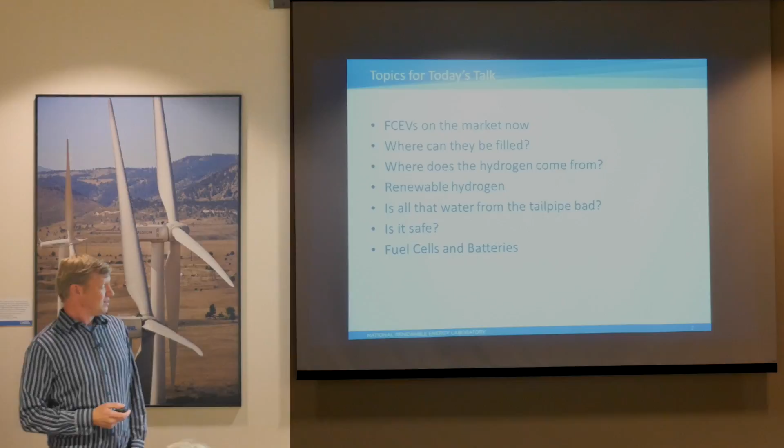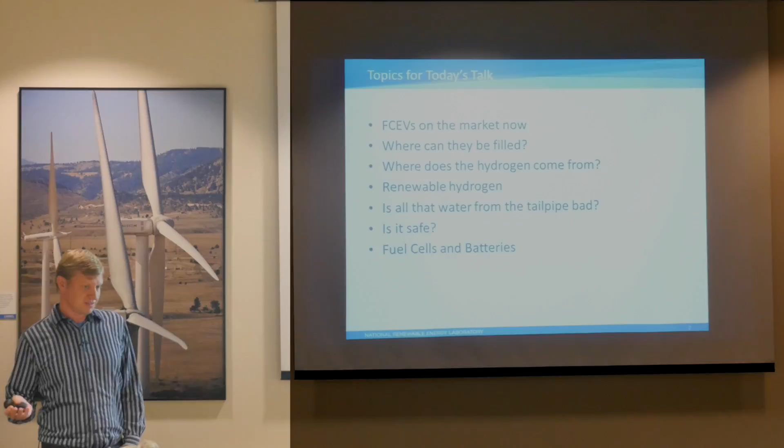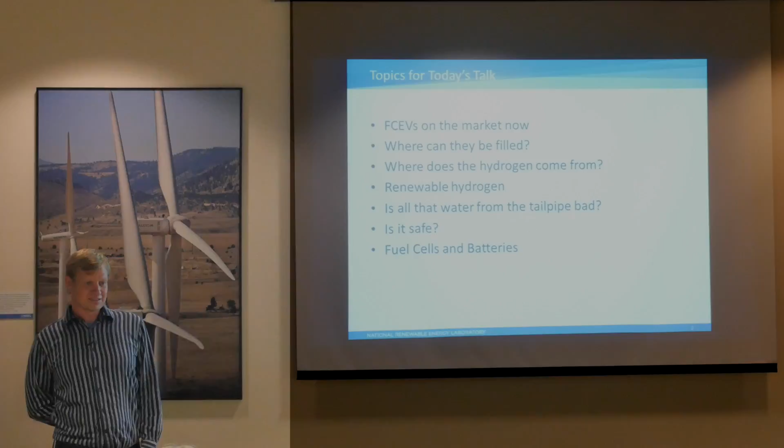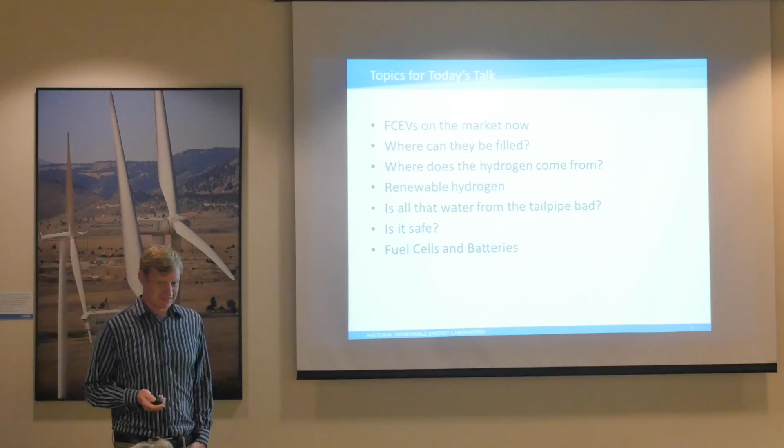I've been managing the fuel cell vehicle program here, where we have 3 fuel cell vehicles on campus right now that NREL employees can check out and drive to events and get an idea of how they work. Doing these events, I get lots of questions, so I was trying to get those answered here, and I was going to use those questions as the basis for this talk. Feel free to ask questions throughout as you'd like.

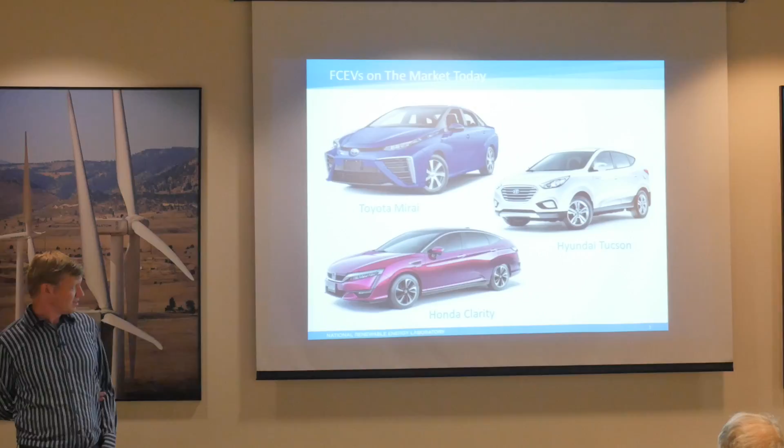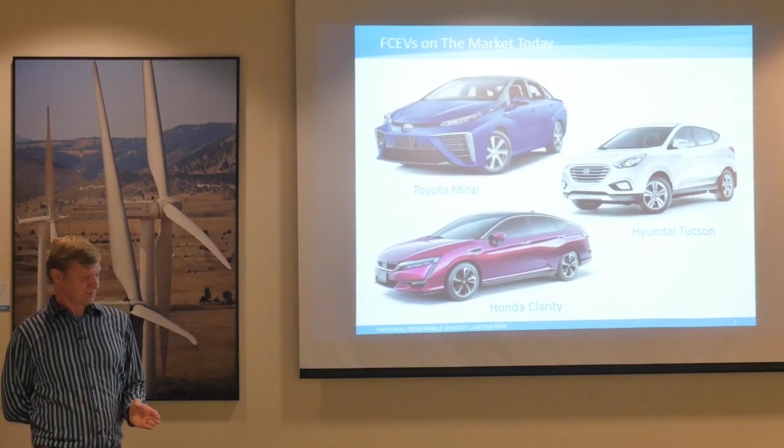These are the 3 fuel cell vehicles on the market right now. The Toyota Mirai has been on the market for about a year. I looked at its sales numbers this morning - they're selling about 40 a month for the first year, but a couple of months ago they had a month where they sold 370. So there's quite a bit in California right now. They're only available in California, that's where the fueling infrastructure is.

The Hyundai Tucson is the white one here. That one has been around a bit more, and it's only available for lease. I don't know those numbers offhand. The Honda Clarity has gone on sale in Japan right now. It hasn't come to the US yet, but they're planning on it soon. I don't know if it'll be by the end of the year or early next year, but that's their plan for the Clarity.

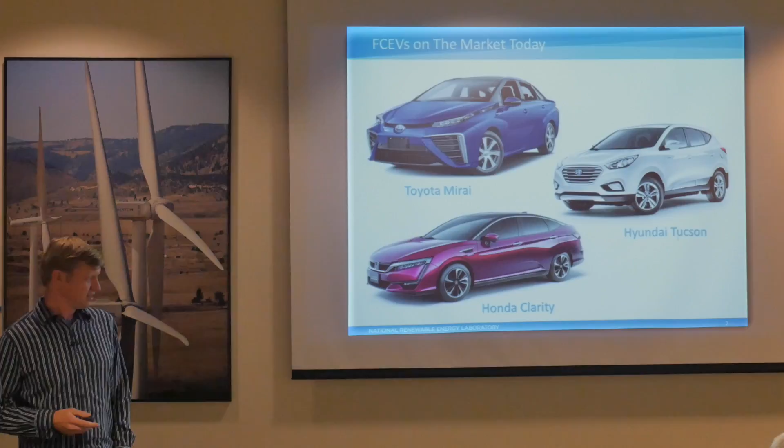I took the spec sheets from the Toyota Mirai and compiled some of the specs that most people want to hear about at these events. The torque is 247 foot-pounds. The storage can hold 70 megapascals of pressure, which is about 10,000 psi. There's 5 kilograms of hydrogen on board, and fueling time takes about 5 minutes.

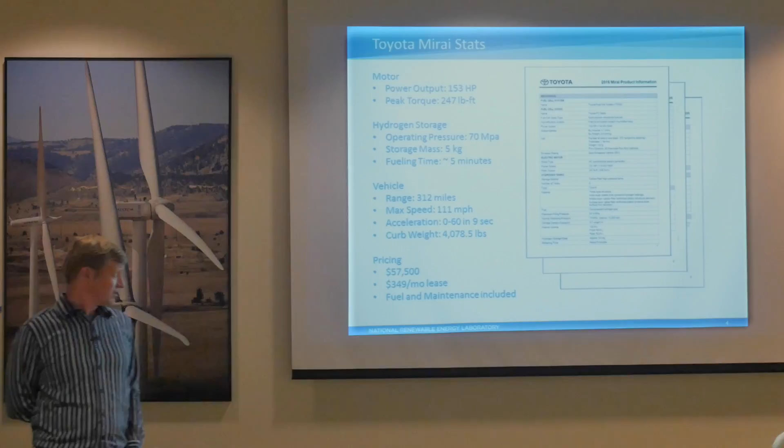As we found, that's a pretty conservative estimate - we can get down to 3 or 4 minutes usually with our fueling station out back. The vehicle can go 312 miles on a fill, depending on driving conditions and the driver. If you accelerate a lot faster, your range will go down. There's actually a power mode and an eco mode on the Mirai - in eco mode you definitely don't have the pickup, but you can conserve your miles. In power mode you can go a lot faster.

Its acceleration is 0 to 60 in 9 seconds, which isn't too bad. Its curb weight is a bit heavier than a conventional vehicle. I'm not sure exactly where the weight comes from, but that's one question I haven't been able to answer yet.

Does it have a storage battery - the fuel cell makes electricity, and then the storage battery delivers it to the wheels as needed? Yes, it has the equivalent of a hybrid battery on board that can store 1 to 2 kilowatt hours. It stores the regenerative braking, and when you let off the accelerator, there's still hydrogen going through the fuel cell that it can divert to the battery rather than to the wheels. So the hydrogen runs a generator? No, it runs directly off the hydrogen fuel cell. The battery can assist as needed, but its main source of power is from the fuel cell. So the battery's just buffering? Yeah, exactly - it can give some initial get-up-and-go and then store energy on your braking as well.

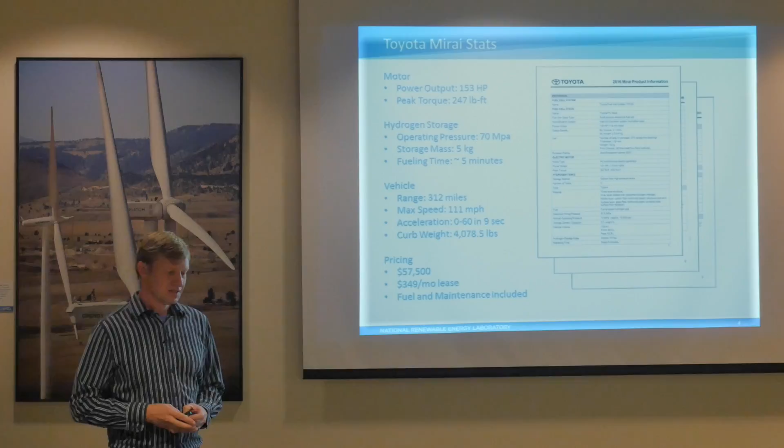Are these PEM membrane fuel cells we're talking about? Yes, they are - those are the lightest and most suitable for transportation right now.

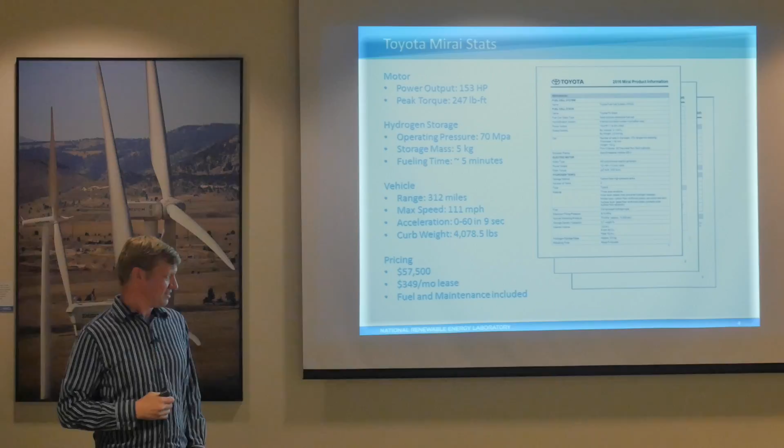The pricing that's out right now - it's 57.5 thousand dollars to buy, and for leases they just dropped it to $349 a month. It was $499, and they just announced last month that it's going down to $349. All fuel and maintenance is included, and I'll get into reasons for fuel being included later on.

There's also fuel cell buses that are being run right now. I do a lot of work with the fuel cell bus analysis here. At AC Transit, there are 13 fuel cell buses being run in their fleet right now.

It's a demonstration project that's been going on for 5 years now, I think.

And the next biggest is Sunline. They actually have 2 different projects going on there, but 4 buses in total at their depot, and the rest are a couple buses here and there.

So the buses have been demonstrated to run really well. The drivers seem to like them. They're really quiet compared to diesel buses. They only put out water from the tailpipe, so people really like it. There's actually a complaint on the buses when the air conditioner would kick on. The noise from the air conditioner was so loud, but it's the same air conditioner as regular buses. They just didn't have the engine noise to cover it up, so that intermittent sound from them became a source of complaint once you took away the engine noise.

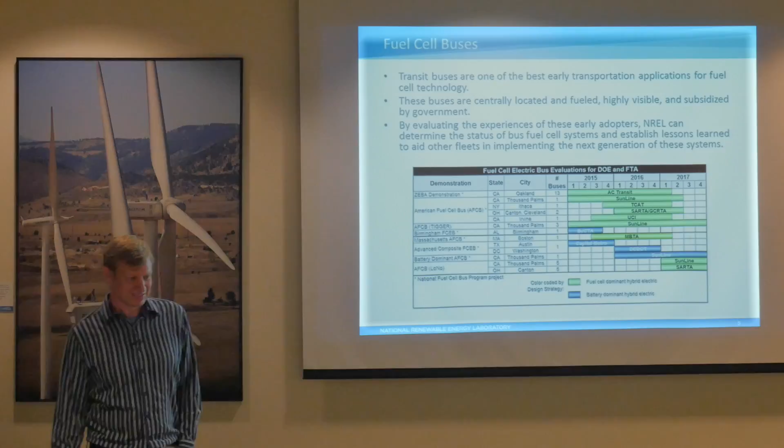What's the hydrogen pressure on the buses? Those are half the pressure. They're 5,000 psi. Because you got so much room, you can do bigger tanks on them and not have your loss that way. So these are a couple that are slated for the future.

This one is an actual going to be a production vehicle coming early 2017, and this is a concept vehicle for Lexus. It's kind of has some interesting stylings that'll be toned down as they go to their production version.

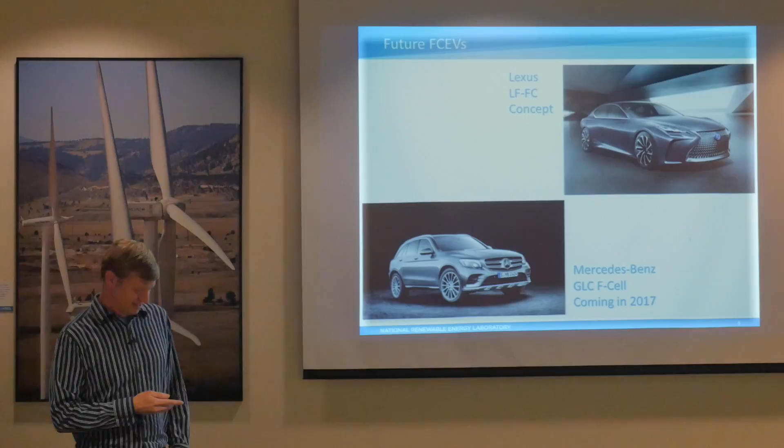All right, so I get the question a lot of how does a fuel cell vehicle work? You open the hood, and you don't see too much under the hood because it's all the power control unit and the motors underneath there, and it's got an air intake and your auxiliary components. That it's not really what actually runs the car.

How serious is air filtration? Like on ICE, you have the air filter that you got to change. Is this very similar to that?

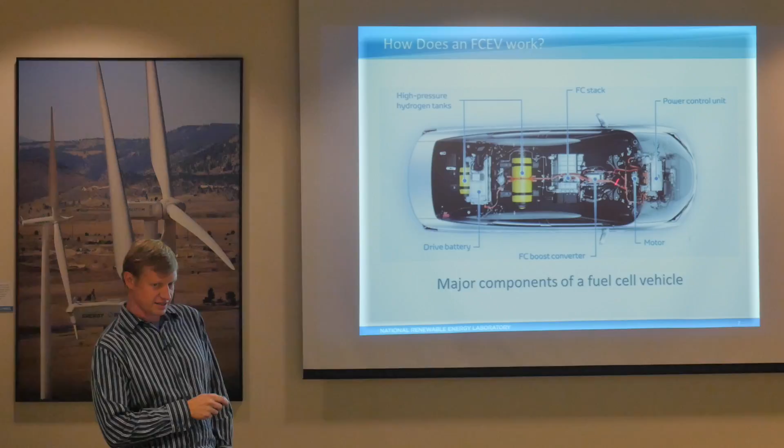And then people ask, how does a fuel cell work? I'm a chemist, but I don't know exactly all the little details of a fuel cell. I work more on the infrastructure side right now, but if you have questions about exact catalysts and everything, I can direct you to people that do that every day. But in general, it's a pretty simple process.

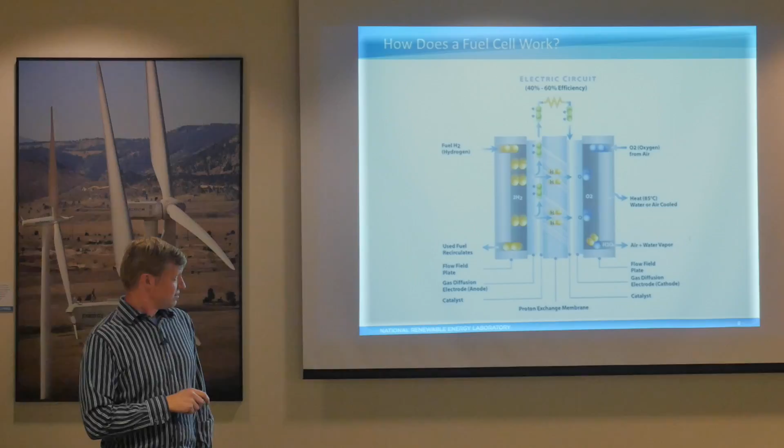You put hydrogen in on one side, and you put air on the other side. You can just recirculate the hydrogen through to keep a fresh supply going against the membrane, and the hydrogen will permeate through the membrane, and as it does that, the electrons get stripped off of it through the membrane. It's an interesting membrane - it has to permeate hydrogen through, but also conduct electricity. So you can capture the electricity through the membrane and bring it back around through your system and come back around to supply the electrons back on the other side. So you basically are taking the oxygen and reacting it with the hydrogen through the membrane to create electricity and then just make water.

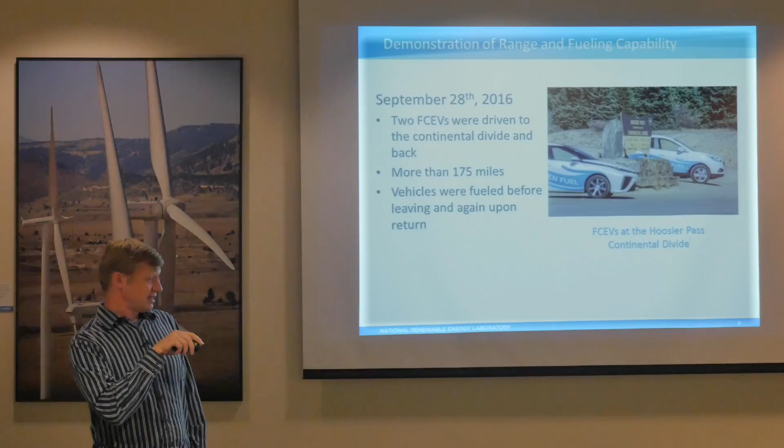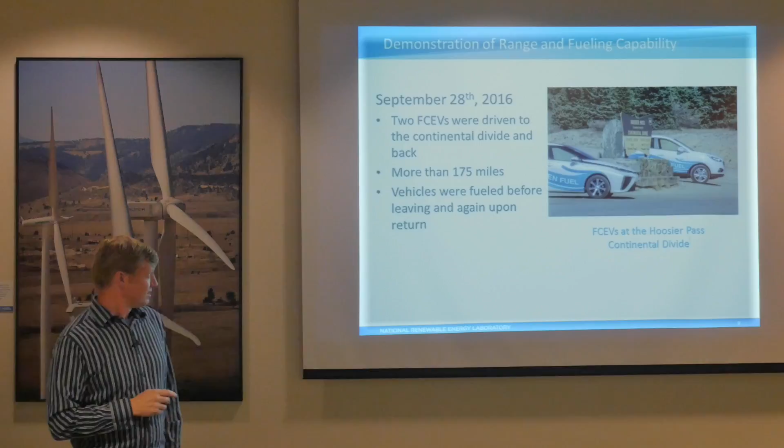So here's a demonstration project we did last week where we took two of the fuel cell vehicles we have up to the Continental Divide. We wanted to demonstrate the fueling capability that we have here, and also show that the vehicles can be used and show the range of the vehicles basically. So we took them up I-70 up to Breckenridge and came back down 285 through Fairplay, and we did a loop that was more than 175 miles. We fueled the vehicles before and after, just to show that you can bring it in and fuel it just like a gasoline vehicle would be today.

So getting into stations, I took this from the alternative fueling station locator, which any fueling station can add their kinds of fueling stations to, and you can go through and find - if you have a CNG vehicle, you can go to the next station.

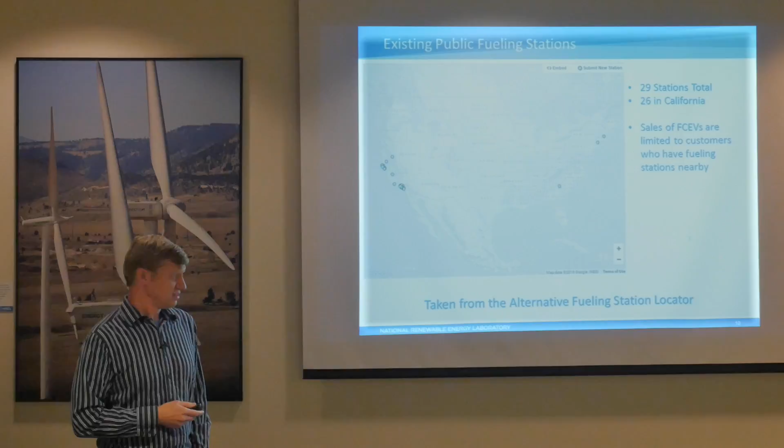The hydrogen definitely has the fewest number on the database. Currently, there's 29 stations, 26 of them are in California. So that's why all the manufacturers are starting out in California. There's a few on the East Coast here that are starting up, but they're really ramping up the production of the stations. So in the next year, these are all permitted and ready to go in some stage of completion, and they'll come close to doubling the amount of stations, which will hopefully allow more vehicles on the road and sustain the vehicles that are going right now.

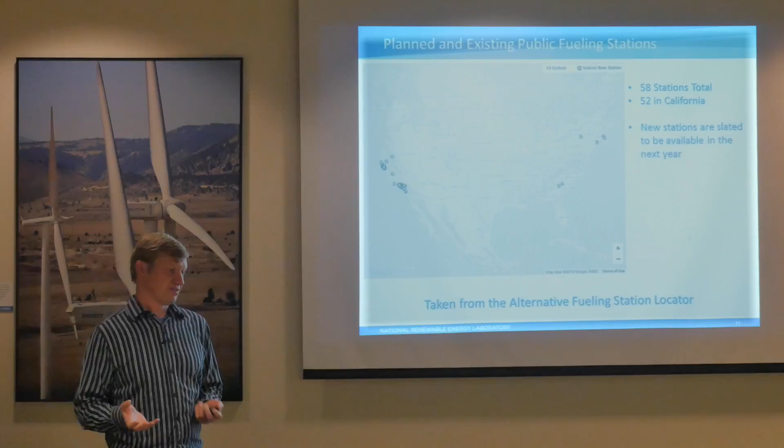So are these stations being loaded out of a big tank truck, or are they using power to do the hydrogen generation? That's a good question actually. Later on I kind of go through how some stations are done, but they kind of have a mix right now because they don't know what the best option is. So there's some that do on-site electrolysis, some that do on-site steam methane reforming, some that have delivery - deliver a big set of tanks that you can put a new one on and pull the old one off, and some deliver liquid hydrogen. So they're going through the options right now and trying to settle in on what the best option is.

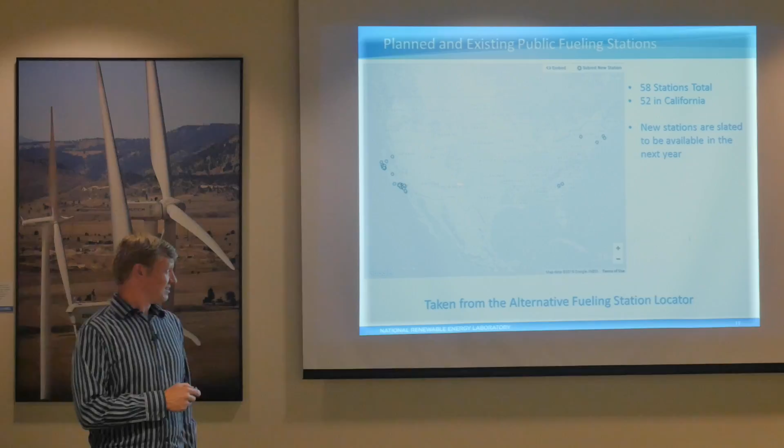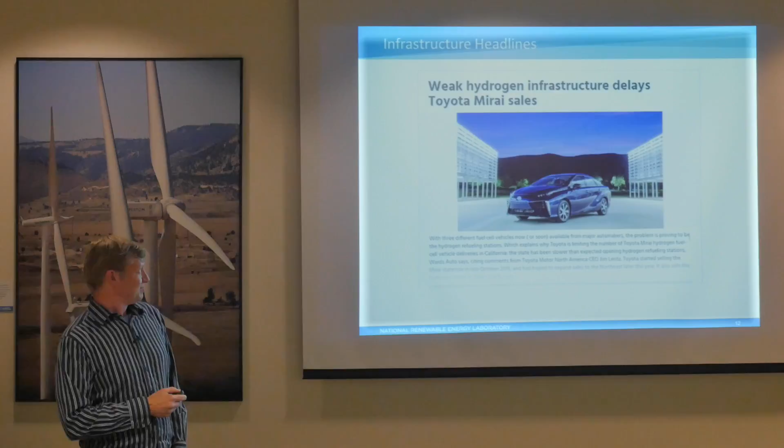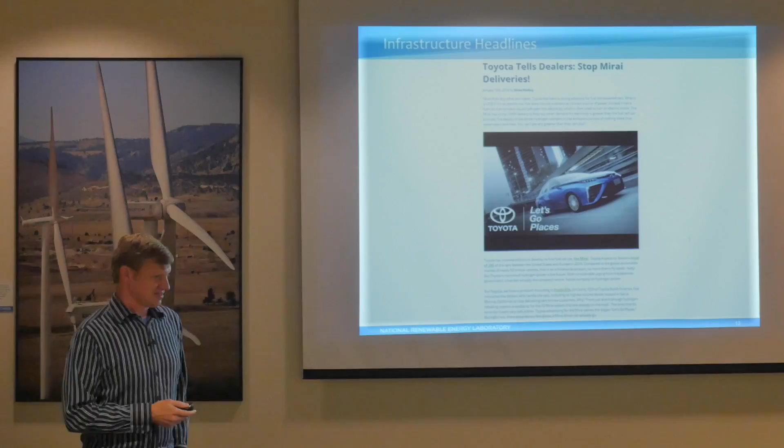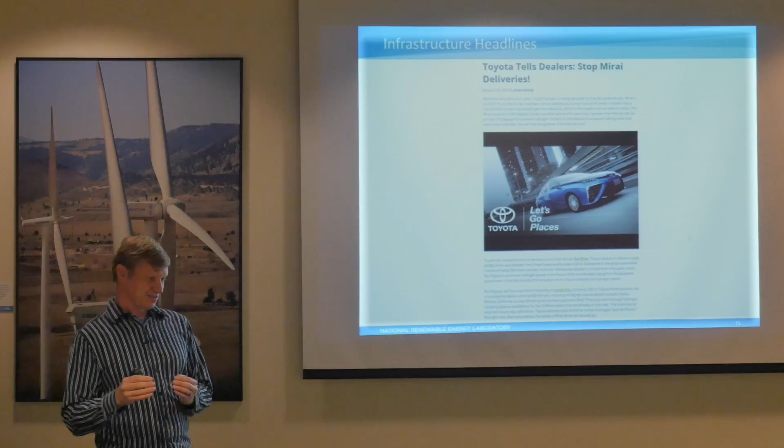So seeing that there's so few stations, it kind of leads you to think, when is this actually going to start ramping up? And so you get headlines like this where weak hydrogen infrastructure delays Toyota Mirai sales, and Toyota tells dealers stop Mirai deliveries. So there's kind of some pushback from the dealers - they want to get these vehicles out, and there's not the stations out there. So there's kind of a balance going on right now of where's the hydrogen coming from to supply the vehicles, and the vehicles are ready to go.

So this comes up to what NREL is working on with infrastructure challenges. Tesla got ahead of this on electric by starting superchargers across the country, yeah, Toyota didn't go and do a similar thing. Toyota is actually funding some stations now, so they're kind of going that route as well. They're doing a lot of the East Coast ones and supplementing some on the California side. So yeah, funding is not my main point of expertise.

But I can find you more information on that if you're interested.

So there's a few things that need to happen for the stations to become really prevalent. Reliability is a big thing we're working on here. We have a test station out back of the ESIF with different size compressors on a big pad where we can swap in components and try out different chillers. We have one dispenser here, and space if we want to put a second one to test out two different dispensers. So there's a lot we can do, and we're really working on ramping that up.

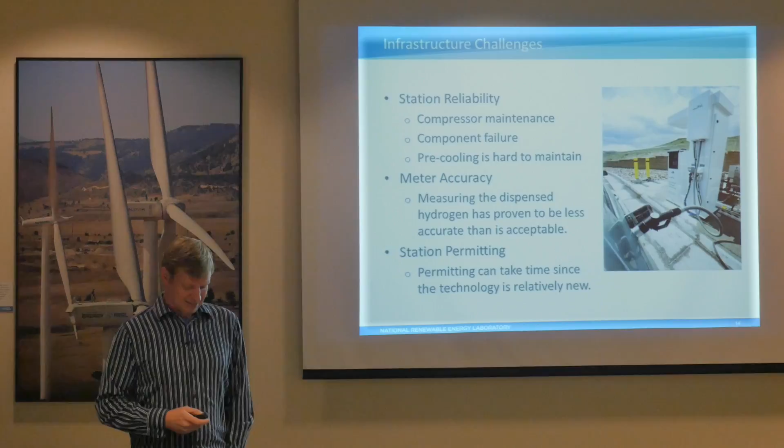And it's all done differently at every state. So that makes it kind of a challenge, trying to get everything standardized, and one state might require one thing where another state won't. So that's the big challenge with the station permitting right now.

So what are the PSI for low, medium, and high here? The low is a couple hundred PSI. I think it comes from the compressor, or from the electrolyzer, I forget exactly, I want to say 200 PSI. And then it'll boost to the medium storage, which is around 6,000 PSI, and then to the high storage, which is 12,000 or 13,000 PSI.

Just curious, why have 3 different pressure levels in the storage? So the electrolyzer can—and that's actually a good point—a lot of stations now are going to a single stage where they'll boost it all at once, and some of those compressors can do that now. This was kind of the standard a couple of years ago when they would boost to medium pressure and then go to a high pressure storage.

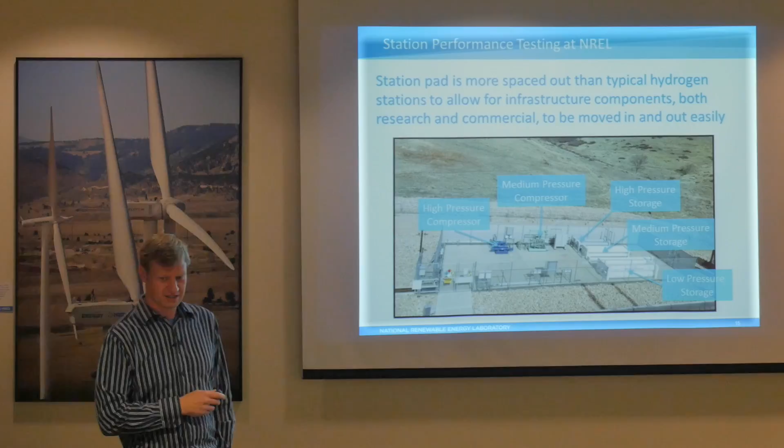Is there any cooling in this? The cooling is done at the dispenser, which is off on this side, so the chiller is back here. I think I've got a picture of it later on.

They do inspections before and after, and it's in a high pressure test bay out back, so they can test it to failure if they want to go that far. They can monitor if it starts losing pressure, and there's monitoring in case a leak is detected.

What is the temperature going through the hose when pressurizing for a 10K automobile? This one has a chiller, so it simulates the chilling as well—they can flow low temperature gas through it and then let it heat up again. What temperature is it? Negative 40, that's where Celsius and Fahrenheit meet.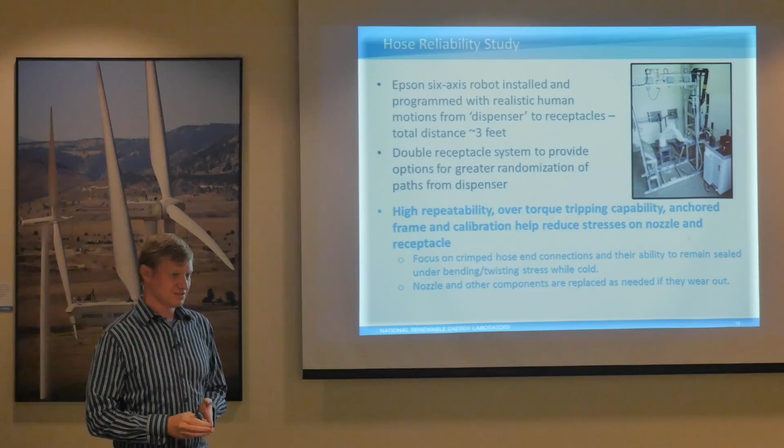Then this is the H2First project that's been started here—it's a partnership between Sandia and NREL. It's a group that determines what projects need to be done, and they've worked with the DOE to fund different projects at the national labs.

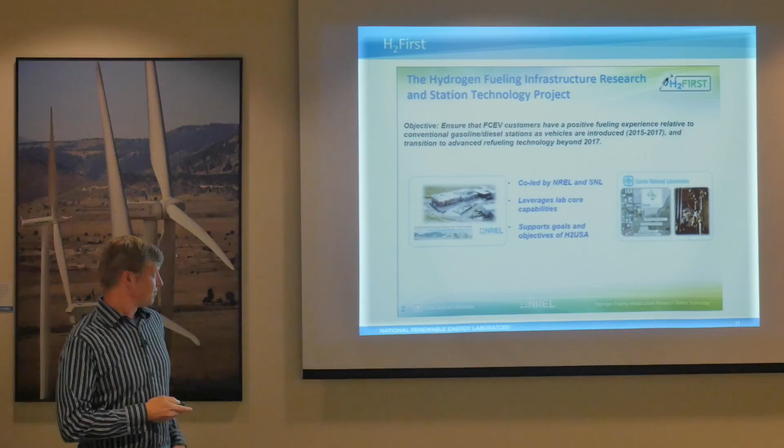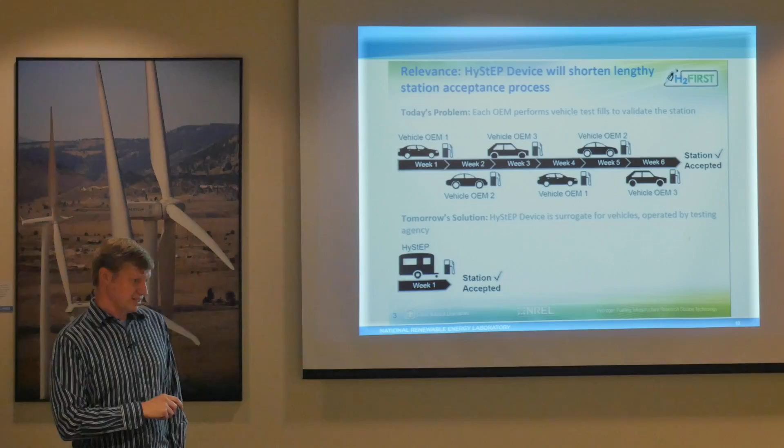One of those projects is the HyStEP Device—a device on a trailer that can be brought to fueling stations to check if it's meeting flow accuracies, flow rates, and the temperature and quality of the gas. It used to be that each OEM would have to certify the station themselves, bringing their vehicle tester there to test for a week, twice, taking about 6 weeks for a station to be accepted. With the HyStEP device, they can bring this trailer there, and all the OEMs agreed to accept that as a certification.

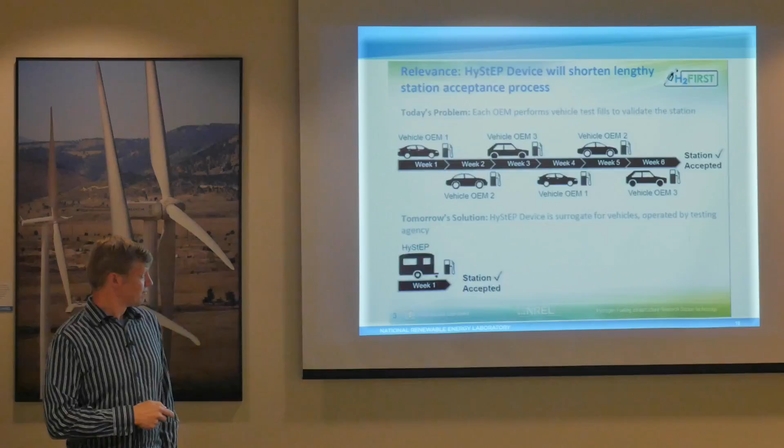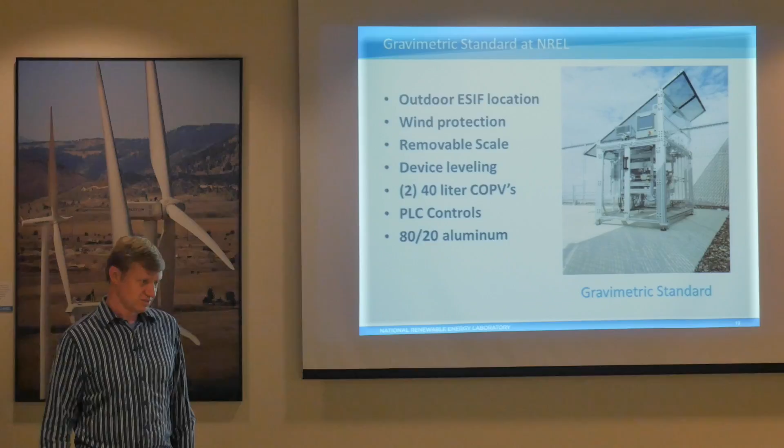This is the video that Carl has been working on—a permitting video that goes through all the steps needed to permit a station. It just came out last week, right Carl? This is going to be a big help for people trying to put stations online.

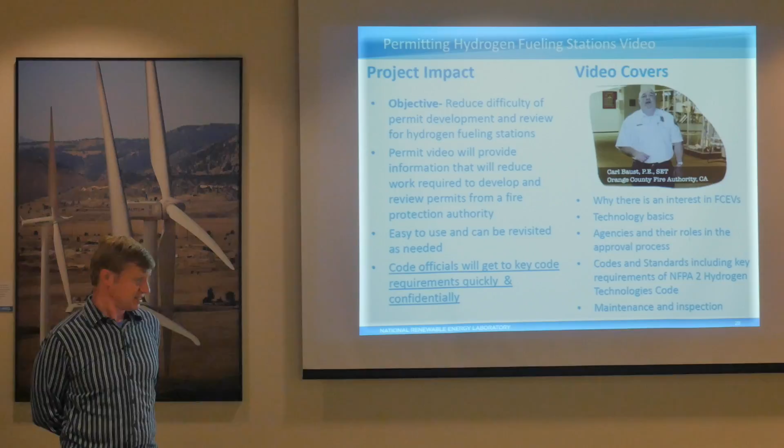So the next question I get is, where does the hydrogen come from? There's 2 methods right now that are being used, plus some other methods being looked at, like making hydrogen from algae or other catalysts. But the 2 main ones used right now are steam methane reforming, and electrolysis, which is basically splitting water. It's doing the opposite reaction as a fuel cell, where you put in electricity, split water, and get hydrogen out.

Steam methane reforming is the cheapest method right now, and there's a lot of methane out there to use. But it does make CO2, and it's a fossil-based gas. Electrolysis is more expensive, but it can be done with renewable sources—you can use wind and solar to provide the electricity to split the water.

So when you say cheapest and more expensive, what price point, assuming electricity rates stay where they're at—because renewables are coming down, but gas can fluctuate dramatically on price—where would the crossover be, how many dollars per million does it become a wash? That's the million dollar question right now. I don't have that answer, and there's a lot of people trying to come up with it, so I don't know right now.

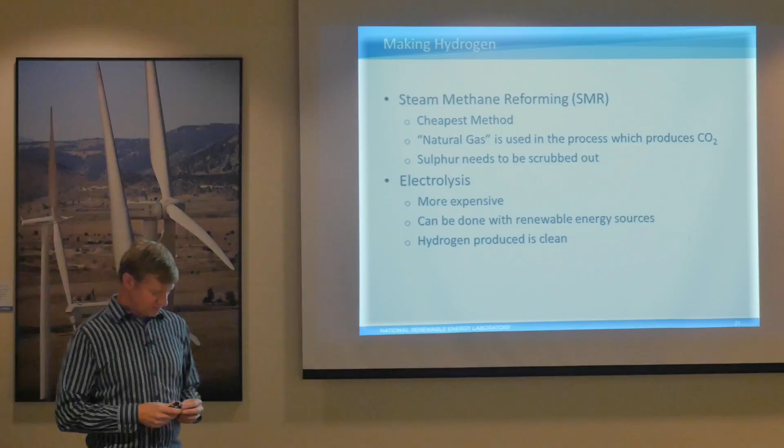So it takes a significant amount of electricity? It does. I forget the exact losses, it's probably a 30% hit there, so you don't get nearly as many joules of hydrogen out as you put in, but it's a way to store energy basically.

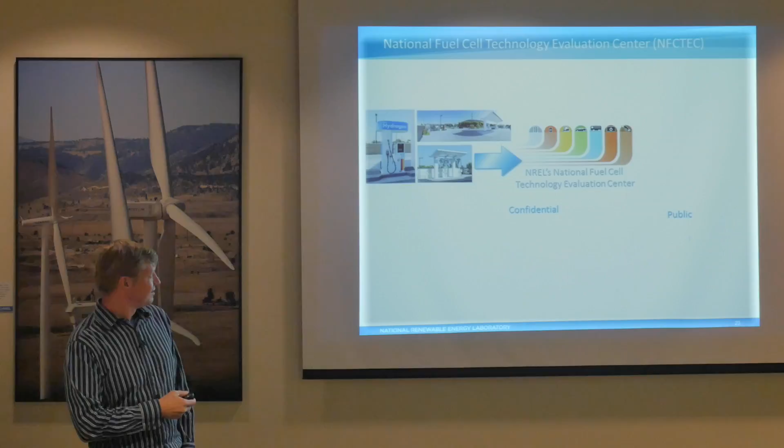Then there's 2 different ways to get the hydrogen to a fueling station: you can produce it on site, or you can have it delivered. They're both being tested, like I said earlier, so I won't dwell on that too much.

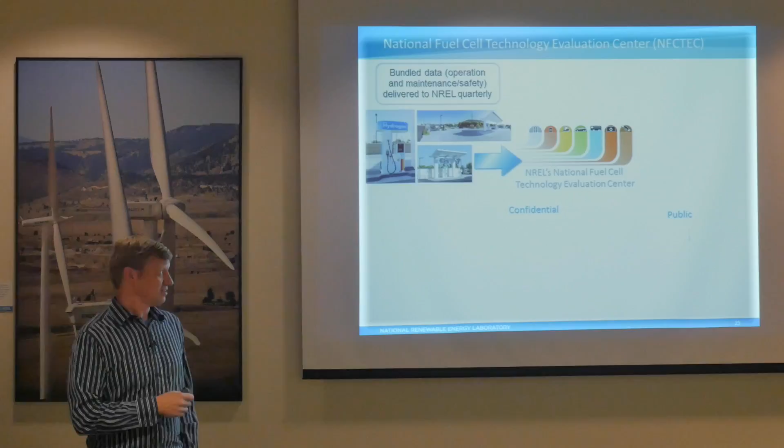This didn't come across all the way. This slide is supposed to be about our NFCTEC, the National Fuel Cell Technology Evaluation Center. If you click through—I think it's sequential. Oh, it is, okay, I didn't realize it did that. I just copied and pasted from a different slide.

So basically we collect data from manufacturers, and we try to get a good idea of where the market is today, so that we can work with the manufacturers and send them back data products that show their numbers versus what's on the market today. And then out to the public, we just send out composite data products, so they can't identify one manufacturer versus another, but can still get an idea of where the whole market is.

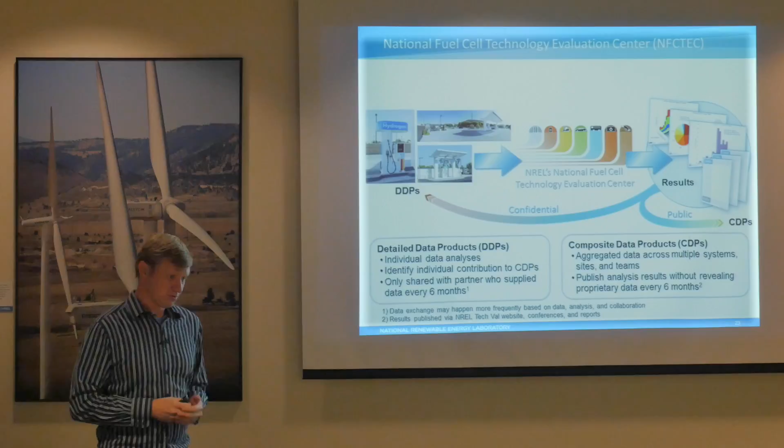Another big project that's just starting is called H2 at Scale. It's basically taking the energy systems at the ESIF and combining hydrogen into that. So how do we take the existing infrastructure, work in hydrogen, and come out with the best products around?

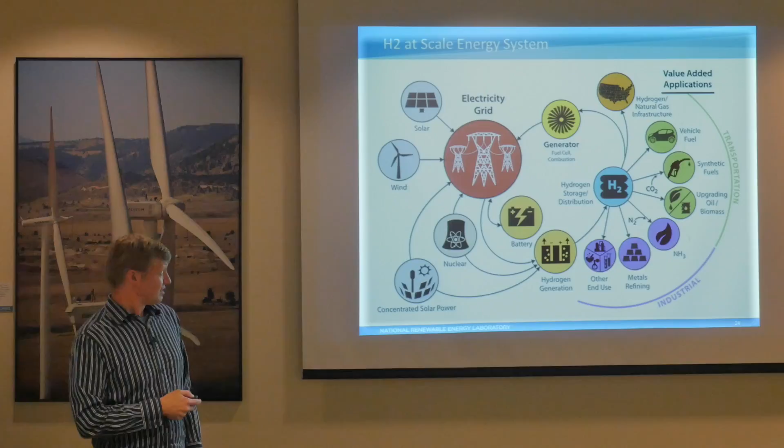This is just coming out, so I don't know all the details on this, but I know this graphic. It shows quite a bit here, where you have renewables coming onto the grid, making the hydrogen, and you can use it in different vehicles and everything, and then come back on the grid if you need to. It's an exciting new project going on.

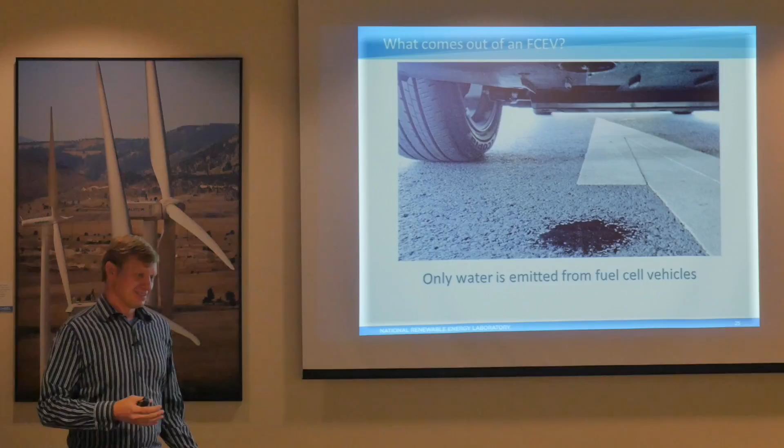So here's where I talk about the water coming out of the vehicles. A lot of people always ask about the water, because you can see it coming out there. That's what it looks like when you park. So people ask, is that bad?

Compared to gasoline, you have 284 kilojoules coming out per hydrogen atom, and 121 per hydrogen atom in a fuel cell reaction. That makes about 2.35 times as much water from the same power of hydrogen as gasoline. But fuel cells are about twice as efficient as a gasoline engine, so that brings it down to a pretty similar level of water coming out from gasoline versus hydrogen.

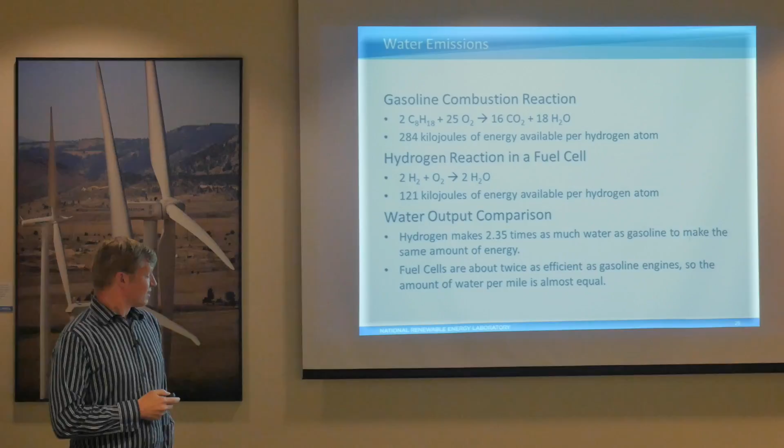The main difference is the water coming out of a fuel cell is a lot lower temperature, so you can see that coming out as water, whereas in a gasoline internal combustion engine, it comes out as water vapor, and you don't even see it usually unless it's cold out—then you can see it start to condense.

Then people have asked, isn't water vapor the highest contributor to greenhouse gases? Which is definitely true, but the water comes out after a few days, whenever you get the clouds coming out and it starts raining. That precipitates out, and its cycle is really short-lived. Whereas carbon dioxide stays in the air a long time, so it's hard to get back out. And the little increase in temperature from carbon dioxide also increases the amount of water that can stay in the air—so that's kind of a double hit there.

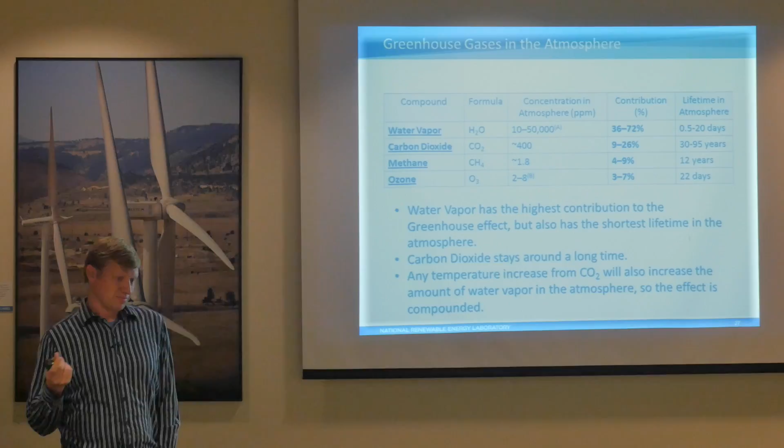Another point is the water coming from gasoline originates from hydrogen that's stored as gasoline, a fossil fuel underground, and then you're releasing it back as water, whereas the water from fuel cells starts out as water and ends back as water.

Now we're coming to the 'is it safe' question that people always come up with. One kilogram of hydrogen is about equivalent to one gallon of gasoline. The Mirai stores 5 kilograms, whereas the Camry stores 17 gallons of gasoline. So you actually have a lot less energy stored on board in the form of combustible fuel.

Would you say, one of those slides further back, it said the efficiency was 30 to 40%, was that right? Of a fuel? The efficiency of the vehicle in terms of all the energy input it took to get the hydrogen to the vehicle, plus the power output—in other words, a certain amount of power input was needed to get the hydrogen there. Right, so yeah, there's a 30, 40%, like you said.

So you're talking about the electricity from the beginning—there's probably a 30% hit on the total input, the energy input to generate the hydrogen, and then what you're actually getting out in the car. So the electricity coming in, you take about a 30% hit to create the hydrogen, and then another 30% hit to get it back out. So you're looking at about half the efficiency.

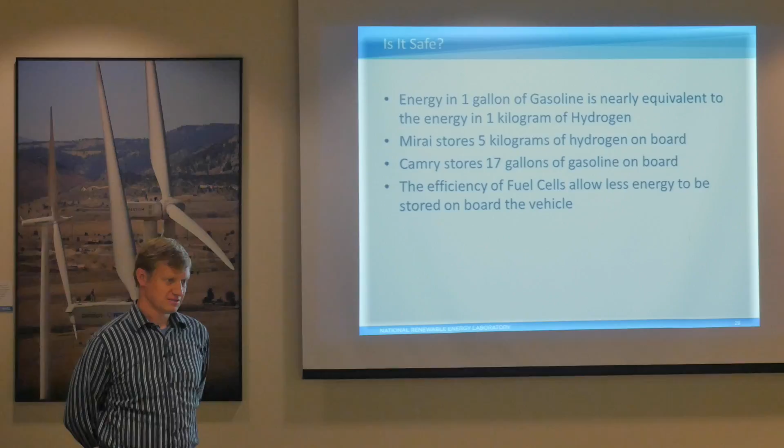In terms of waste heat in the vehicle, it would be considerably less than any combustion engine. Exactly—that's why water comes out as liquid water quite a bit versus water vapor. So there's a lot less waste heat with that system.

Of course, it depends on how you generate the electricity in the first place, but all you're doing is borrowing water for a while, then returning it. Exactly, that's the idea. It doesn't solve the drought problem in Alaska. No.

That brings up another observation: without the waste heat of an internal combustion engine that's used to heat the cabin and everything, you have to use electric heaters in a fuel cell, same as an electric vehicle. So you have a lot less efficiency if you're using the heater and auxiliary things as well.

But fuel cell vehicles are working a lot with the knowledge from electric vehicles that are out there today, so that's really getting there—there's a lot of solutions out there right now for that.

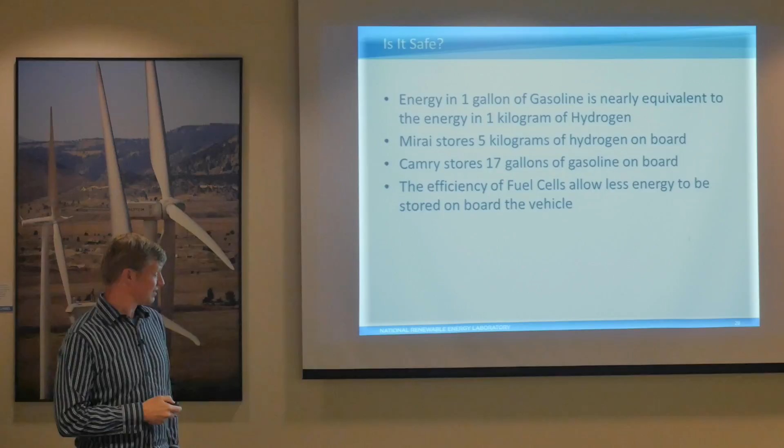They're made to leak before burst, so one of the tests they do is shooting them with a gun and putting a hole in it, and they have to hold together and just leak out rather than rupture the whole tank.

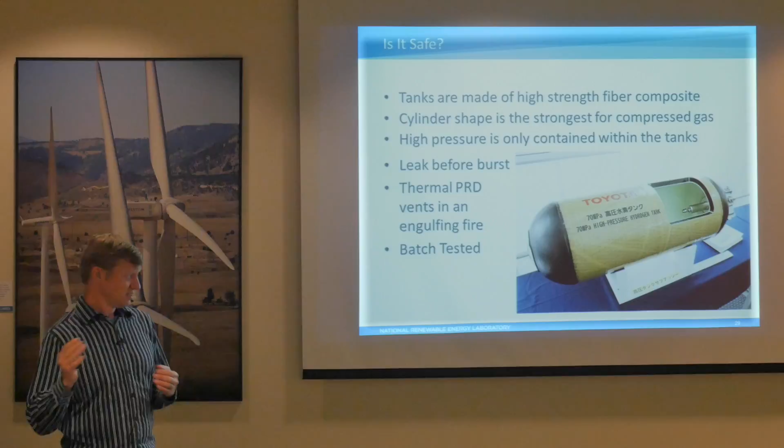If they're engulfed in a fire, there's a relief device that's temperature activated, so it'll open a valve and just dump it out at a safe rate before it can burn the walls of the tank to rupture.

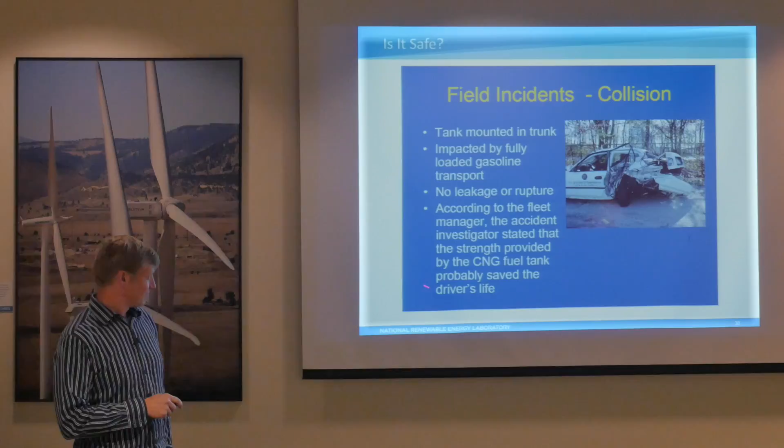So yeah, that's leading to the NREL Safety Codes and Standards program, which Carl is the head of here.

So at NREL, we do lots of evaluations of safety in hydrogen. We have our sensor laboratory—that's where I started out here. So we test the sensors that are going to be used in hydrogen, both the safety sensors above the dispensers and the sensors that can be used on board a vehicle, anything like that. There's a lot of different aspects to the safety codes and standards work being done here, and it all feeds into the safety codes and standards that are being put out there today that involve hydrogen.

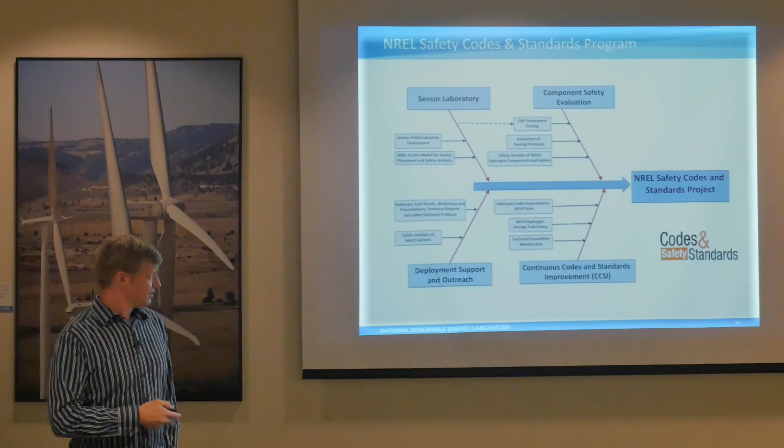So now we're getting into the big question that everyone asks: you have a battery that you can store it on, so why would you use fuel cells? Fuel cells and batteries are the only two viable options for zero carbon emissions transportation. There's been a little bit of looking into nuclear, but I don't think anyone likes that idea anymore.

So obviously Elon Musk has been an opponent of fuel cells with his Tesla out there, and his argument is battery storage is more efficient—you don't have those efficiency losses. So why would you ever want to do fuel cells?

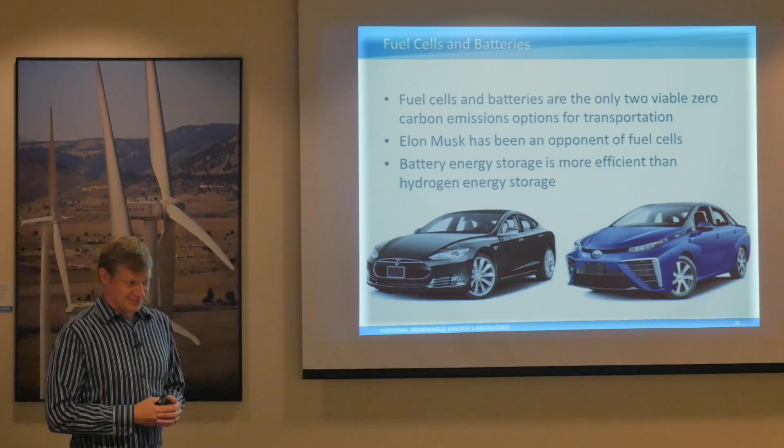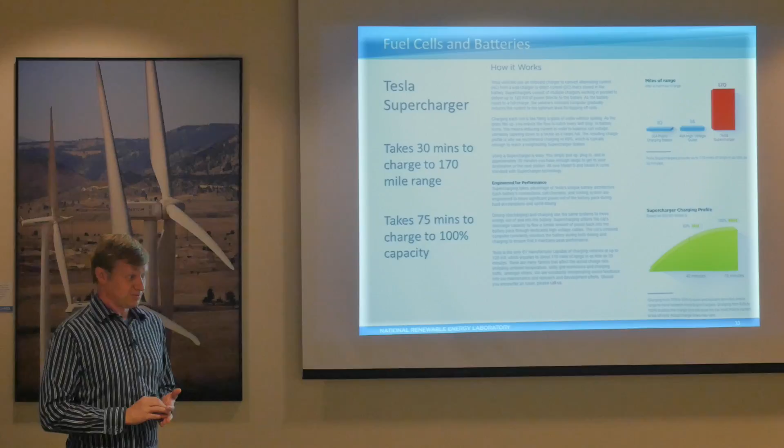Some other downsides to storing on a battery is the weight of a vehicle. The Tesla is about 5,000 pounds, so it's about 1,000 pounds heavier than a fuel cell vehicle. So you have increased wear on your suspension and brakes. But overall, fuel cell vehicles are still a bit heavier than gasoline vehicles, which...

Let me just say something about the brake wear. Since on a Tesla you're pretty much regenning whenever you slow down, the brakes will last for 500,000 miles. So the brake wear is not a real issue. All right, people can feel my brake rotors out there afterwards. Sounds good.

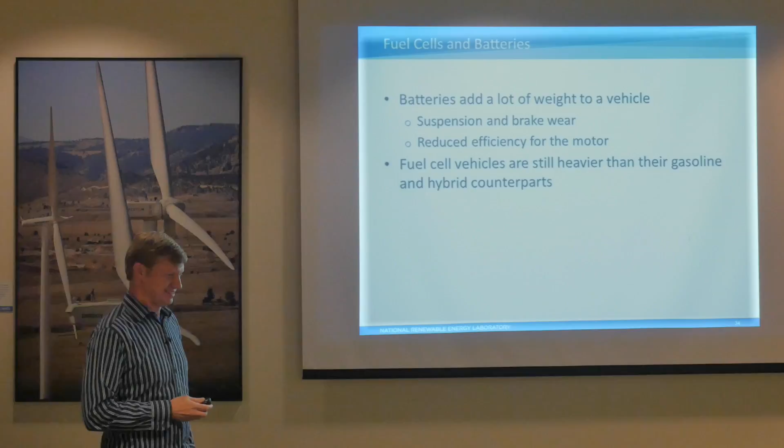So yeah, the next step is comparing batteries to fuel cells—it's basically a change in paradigm on how you drive today versus how you're driving in electric in a battery electric society. Elon Musk has stated that in 20 years, owning a self-driving car will be seen as a hobby. You would basically drive a vehicle like you would have a horse today, as compared to how you used to rely on a horse for transportation. Whereas Toyota wants to meet the needs of their current customer base, and they really see that as their model that they're following, and they think that'll stick around.

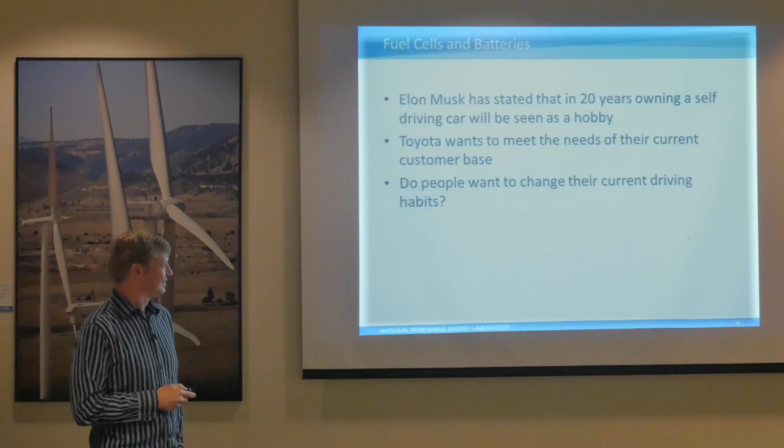I don't know what's going to happen in the future. That's the big question to find out. Will people want to change their driving habits? It's really something we'll see in the future. Any questions? Thanks.